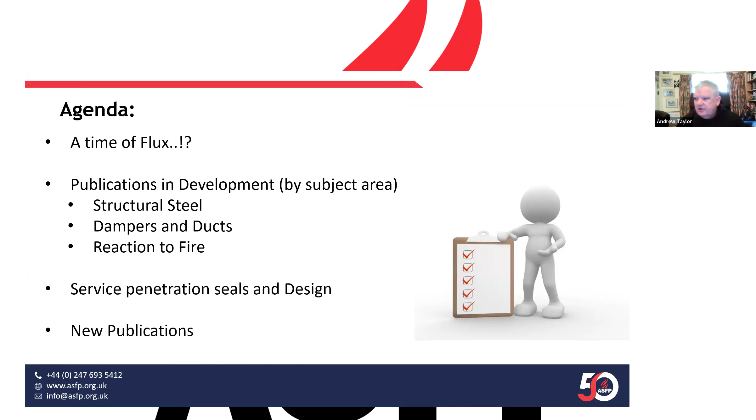Okay. So what I'm going to do here is there's an awful lot of stuff we're doing at the moment. There's an awful lot of our guidance notes and advisories that need to change. Why? Well, because we've got a time of flux. There's an awful lot of things going on out there in the wider world that means that our advice needs a bit of looking at and some development. We've got a number of publications in development in various areas: structural steel, dampers and ducts, reaction to fire we'll talk about. And then I want to move on and talk about service penetration seals especially, and that feeding into design work. And we'll cover a few bits about other bits and pieces at the end.

Okay. So I say it's a time of flux. There's a number of key things that have happened since September last year. In September last year, the Grenfell Tower Inquiry, Martin Moore-Bick published the Phase 2 report that found that the deaths at Grenfell were, as we kind of expected, completely avoidable. Beyond that, we had the announcement from government about the removal of recognition of 476 tests from ADB.

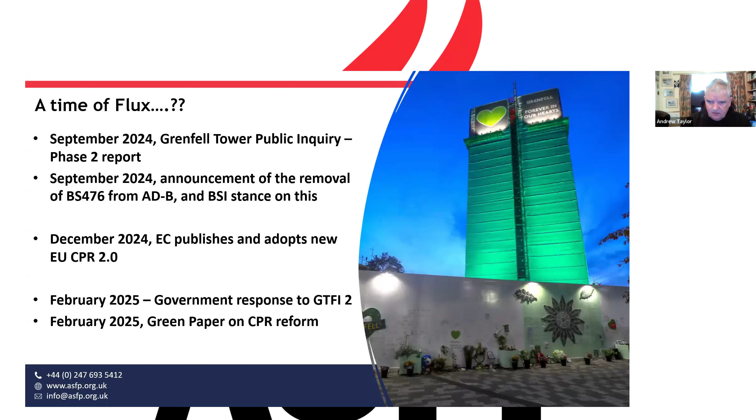And we're now moving into an area where construction product regulations are being revised and changed. We've been talking about this for the last 7 or 8 years. Well, in December, the European Commission adopted the new European CPR. And in February, our government not only published a response to the Grenfell 2 inquiry, but they published a green paper on construction product reform in the UK. So let's look at how all that might or might not affect our ASFP advisories.

The Grenfell Tower Public Inquiry made 58 recommendations, and although most of those were for government and local authorities, 8 of them were relevant to areas concerning ASFP. And I'll be honest, it didn't really build on Hackitt, Morrell and Day, except for the fact that they were covering different things, they were covering test labs and certification bodies, and government committed to responding to those in 6 months. So basically the industry at that point said, right, okay, well, we'll wait and see what government is going to do. We did that, and we waited because from September we were expecting to see publication in March.

One of the things that happened very, very shortly after was government also announced that they were going to withdraw BS 476 for recognition from ADB. In terms of reaction to fire, that was to happen within 6 months, and the 2nd of March 2025 was the deadline. So that's now happened. From a fire resistance standpoint, we were given a 5-year transition period, so that's with effect from the 2nd of September

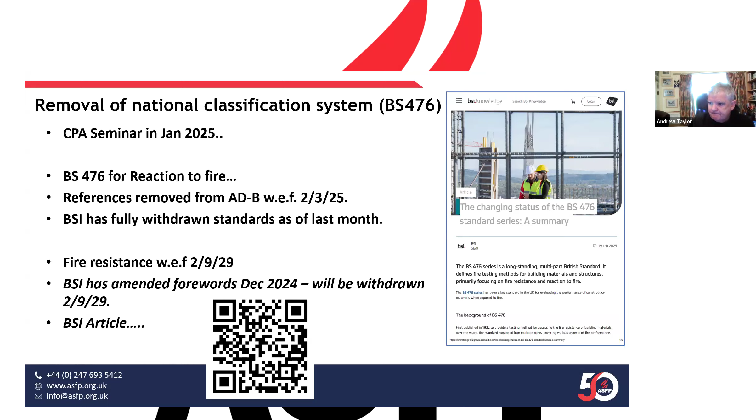Basically, as it stands at the moment, BSI has fully withdrawn the reaction to fire standards. So tests like Part 6, Part 7 are now fully withdrawn. And BSI amended in December last year the forewords for the fire resistance tests, Parts 20 to 24, to say that they will be withdrawn fully by BSI as of the 2nd of September 2029. Okay, I'll just leave that there for a few seconds if any of you want to have a look, or zap that QR code. Okay.

Next one on the list, and you're all going to turn around and say, why is this relevant? The EU has been talking about amending its construction products regulations for around about 7 or 8 years now, if not more. May even be more than 10 years that this review of EU construction products regs has been going on, because I'm fairly certain I was still at Leeds when I went to the first meeting on it. And that has now been published.

Much of it will remain the same, but a lot of our products that we sell around Europe are in the voluntary system, EAD, ETA, and that's outside the harmonised zone. So there is the possibility of countries still having national requirements. Most of the fire protection products are not covered by a harmonised product standard. It's unlikely to become a new product family for about 4 or 5 years, but we have gone up the priority list from not a priority to about number 18, 19, and we've sort of been tied in now to gypsum products and mortars and mastics. So there's a bit of a sense there.

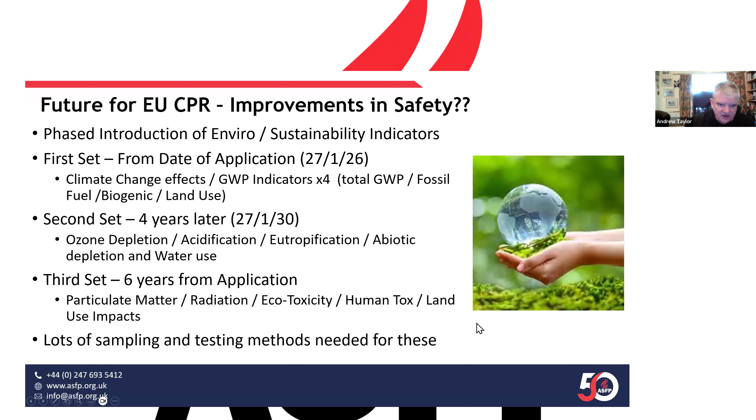And within digital product passports, basically the Europeans are getting a version of separate EU consumer legislation, and the delegated act should be coming out in autumn. Then there's voluntary use within 6 months, and then voluntary use for another 12. So it's going to be sometime around 2027 by the time this comes about. This will include a digital product passport with your declaration of performance, your instructions for use, your product safety information, and that needs to be free to access and maintained for a minimum of 10 years.

Okay. Now, there's a little slide to do first, but can you just remember all that stuff, because we're going to come back and talk about what the UK is going to do with the European stuff in a minute or two.

So end of February, government produced, as they said they would, a response to the phase 2 Moore-Bick requirement. They accepted as best they could all 58 recommendations, although some they notably accepted only in principle. One of the key concerns there was going to be a new construction regulator responsible for assessing and publishing product

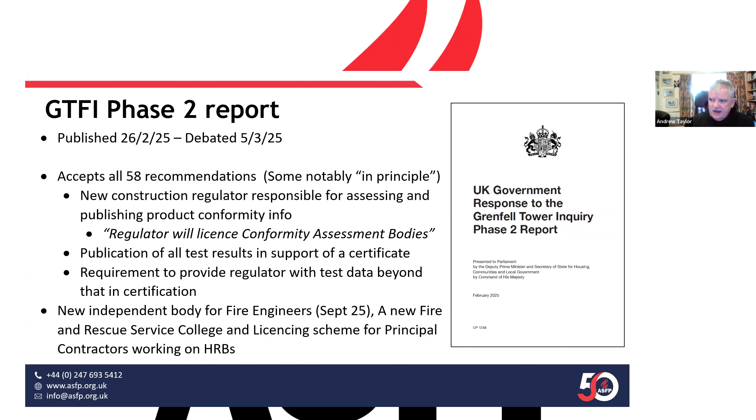The same day that came out, we also saw the construction products regulations green paper published. It looks like it's a white paper, but it's a green paper. And that's a consultation with 58 questions, and that closes at the end of May. So you've got a smidge over 3 weeks to get your responses in. ASFP advocates that if you are a manufacturer of construction products, one of our manufacturer members, please submit your response to this. It's very, very important.

One of the biggest things in here, a big change in emphasis, is safety critical. We talked in the past about what safety critical is, and that it was changed from safety critical to products critical to safe construction, which initially just sounds like word soup. It's the same thing but called slightly differently, but it's not. It's actually quite a significant change.

Products critical to safe construction recognizes that there is going to be a requirement for products to be covered by a national or recognized standard that supports safe installation. So for products critical to safe construction, design, installation, and use potentially come into scope. Okay. So the current construction product regulation ends at the factory gate. The manufacturer makes the product, he ensures that the product is the same as it's ever been, and that product leaves the factory guaranteeing the same performance as it has previously, consistency of performance.

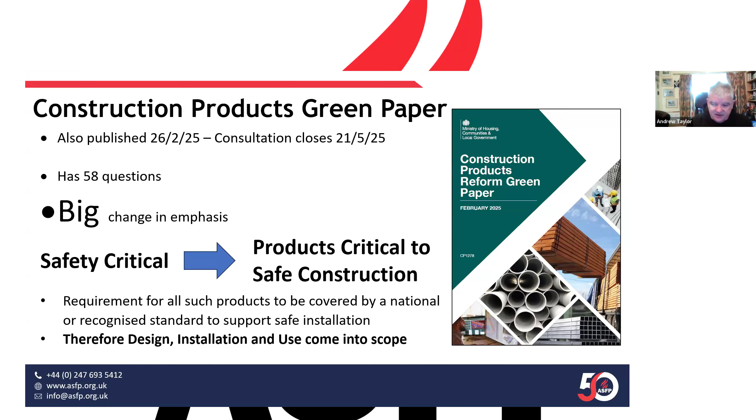Well, now there is the possibility that this is going to go further, and this is going to consider design, installation, and use. What I would say there is that we've talked in the past about a three-tranche approach for construction products reform. All construction products are going to come under this general risk-based safety requirement, and there is a new code of practice for risk assessing construction products being drafted by BSI. That's PAS 2000. Draft for public comment in summer, publish in February.

And beyond that, there is still the mandatory compliance for the stuff that's got designated standards, and the designated British standards will remain aligned to the reformed European regime. So government thinks it's got the ability and the authority to bring in any European environmental sustainability requirements and digital product passport requirements. They're all going to be brought in. So hence why I was saying to you about the European stuff, be mindful of it and watch it, because under the current government, they are seeking to reset the relationship with the European Union and look at it from that point of view.

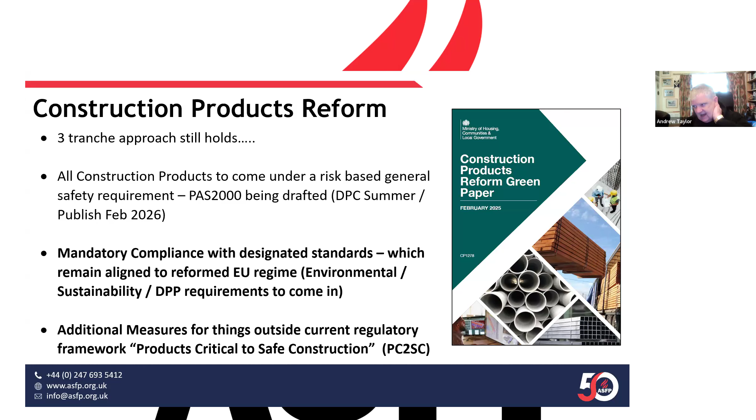So how does this affect ASFP guidance? Well, the first casualty is our orange book, the reaction to fire guide, reaction to fire coating systems. We've basically had to withdraw it because it gives advice on the use of Class 0, so we've currently withdrawn it.

I need to reconvene TG4. I'll be honest, it hasn't met since before computers - I don't think it's met since 2010. Niall and I don't think it's met in either my time as tech officer or indeed prior to that in Niall's time as tech officer. We're going back to Bill Parler and the box of papers down under my desk here - probably parchment.

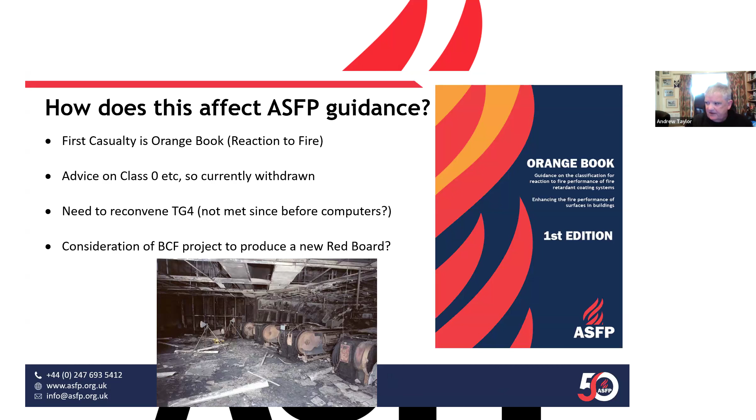We've just recently done an upgrade to some of the Yellow Book, and we need to finish off and deal with the rest of it.

What did we do with the Yellow Book, and why did we do it? We decided that it was too complicated, too long, too intertwined with the fact that we had testing and assessment stuff in there, and they were all intermixed. So we split it into 3 volumes.

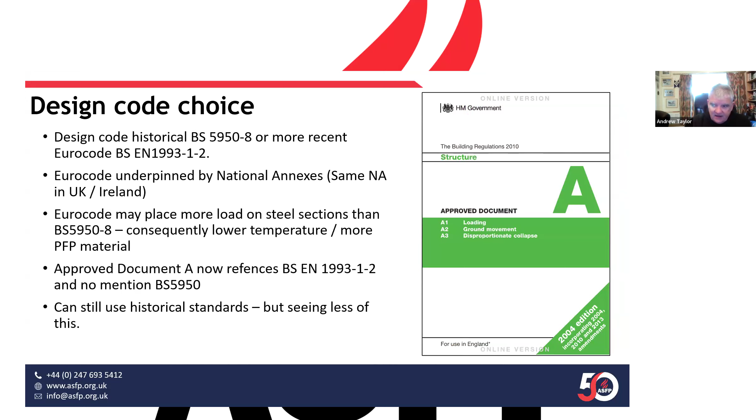Volume 1 is for design, specification, and installation, and the other 2 volumes will be to do with testing. We've had to change it because the design code that was in the Yellow Book used both BS 5950 and Eurocode 3, but to be honest, we're now moving over more to Eurocode 3, because BS 5950 has been removed from Approved Document A, so we've moved over to Eurocode 3 as well.

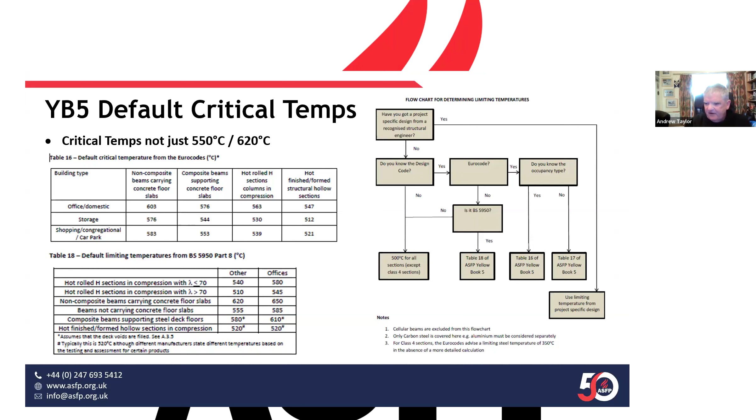One of the issues we had was in Yellow Book 5, we had various critical temperatures in there, not just 550, 620, but interlinked to the design code, the Eurocode and 5950, and different uses, and it was all very, very complicated.

And because it was all very complicated, we've simplified it, tied it into the National Annex of 1993, Part 1, Part 2, so we match Approved Document A. And we've done that with Volume 1.

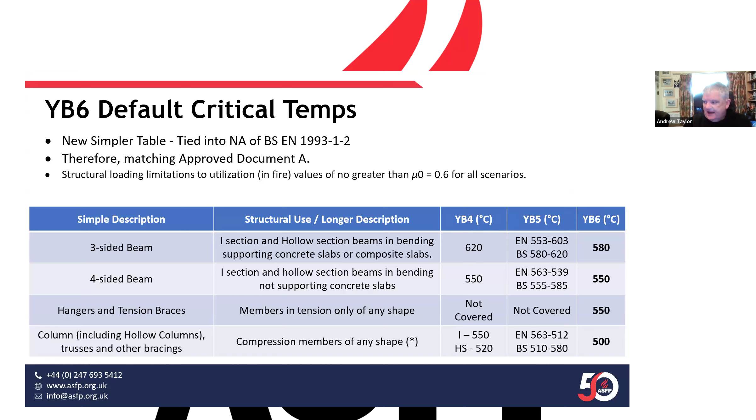Our next challenge now within the Yellow Book is to work on Volumes 2 and 3, because those contained a testing method and an assessment method used in conjunction with BS 476 tests. We've been looking at revising the assessment methodology, but it's got a limited lifespan, given the end of 476 is now September 2029.

The newer standards, BSEN 13381 Part 4 and 8, already have an assessment method, so we can't do that. So Volumes 2 and 3 have been delayed, but we think they're going to come soon, because certainly Volume 2's got quite an advanced draft. I'm going to try and get that out.

The TG1 chair, Ian Bradley, is very keen to get that out as soon as we can. So we'll be working on that. We need to do a bit more on Volume 3.

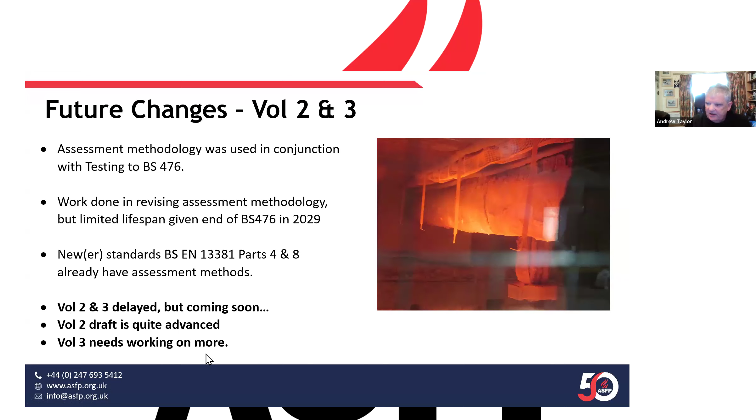And while we're at it, in structural steelwork, we've got all sorts of other bits and pieces to do. We've got to do some revalidation of the unfilled voids guidance, for where we've got a trapezoidal deck above a composite beam.

And we also need to do, as ASFP, significant work to produce a more detailed advisory note covering secondary heat transfer from secondary sections, be that heat transfer on a compartment line, heat transfer across a compartment line, and heat transfer into a member in the middle of a room that's fully engulfed in fire.

We have an advisory note 21 out there that covers one of those scenarios. It covers the scenario where you have a beam or a column in the middle of a room, and it ends up being fully engulfed in fire and is connected to an unprotected secondary section.

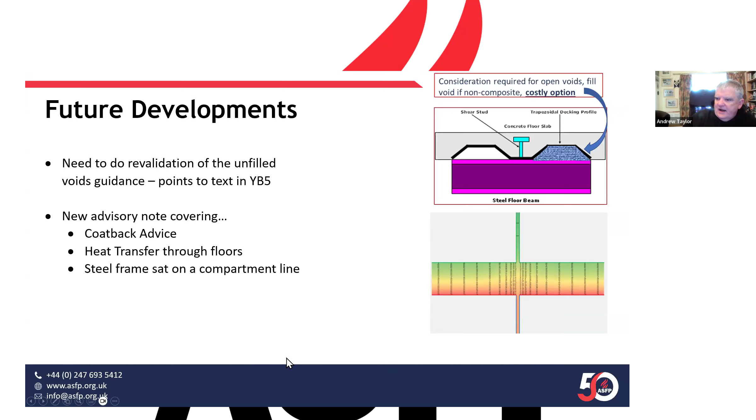The problem is that advice, because it only concerns one system, one situation, regularly gets misinterpreted and abused, and it's probably one of my least favorite technical questions that I get about once a month from somebody saying, I've used advisory note 21 for a piece of steel that crosses a compartment line, for which it's inappropriate. So there's a definite need there for further advice.

I'll mention now, in terms of publications, the Grey Book. I was getting a lot of grief yesterday, and I will be working on the Grey Book tomorrow to try and get those final drafts of these two documents out. Grey Book 3rd edition, Volume 1 covers fire resisting dampers, and Volume 2 covers smoke control dampers.

One of the things Grey Book will heavily advocate against, and this is going to become a common theme as we go through, is getting the correct terms and the correct terminology right. One of the things here is we regularly see the term fire and smoke dampers, and that doesn't help. It doesn't mean anything, and it's a term that gets used and abused.

Is it a fire resisting damper? Is it a fire resisting damper with a smoke leakage performance, or is it a smoke control damper, to be used as part of a smoke control system that should need proper designing? That's the sort of thing that we need to consider, and that's the sort of thing that we're going to be doing a lot of over the next few months.

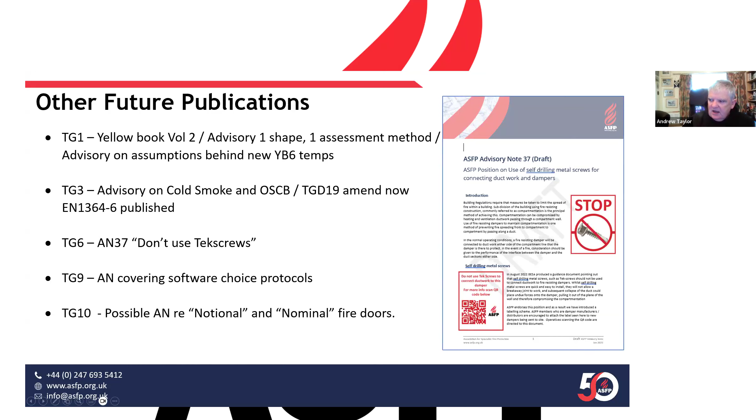Beyond that, we've got an awful canon of documentation out there, some of which is quite old and needs looking at. So over the next 6 to 12 months, and if you've been to one of our TGs already this year, the process has started. We're looking at historic documentation, asking for comments back.

Interestingly, this also came up recently, earlier this week at Passive Fire Knowledge Group, with lots of clamour from people to amend that advisory note to be far stricter, in that we only recognise from ADB the approach of alternative A: provide a proprietary sealing system.

It says we could have a 40 mil pipe, and you can actually put a bundle and cluster of 40 mil pipes next to one another, creating a whomping great hole that will burn away in 5 or 10 minutes in a fire. And we leave large gaps, yet we get upset about gap gauges of 3 millimeters. You'll fail something on a gap gauge at 3 millimeters, but you can have a 40 mil pipe according to ADB.

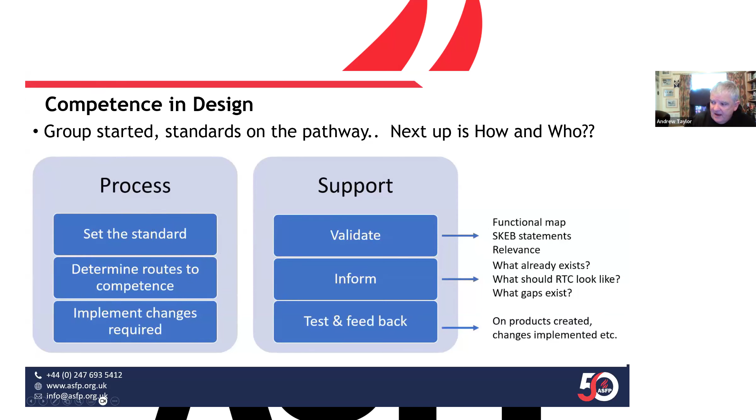And we'll do that. This first box, setting the standards, the functional map and the SKEB statements - I don't know whether you were all aware, but we've done it. It's published. If you go on the ASFP website and into the competence framework, now there is all these things.

There are all these design specification things set up. So you can have a look at what those SKEB statements look like, and if you've got any comments, have a look, have a think, and feedback to us accordingly. They're there, set in a fairly soft, malleable sandstone, but they can be changed.

Okay, please have a look at that.

One of the key questions for that group next will be how you do it and who does it. With that in mind, the question is, if we're still being asked for this development guide, this advisory note, to get around the fact that people don't want to follow Advisory Note 33 - why isn't our Advisory Note 33 enough?

And the answer is because it tells you what to do, not how to do it. This means that what we need to do is produce a massive overarching design guide that tells you not just the what to do, but also the how to do it.

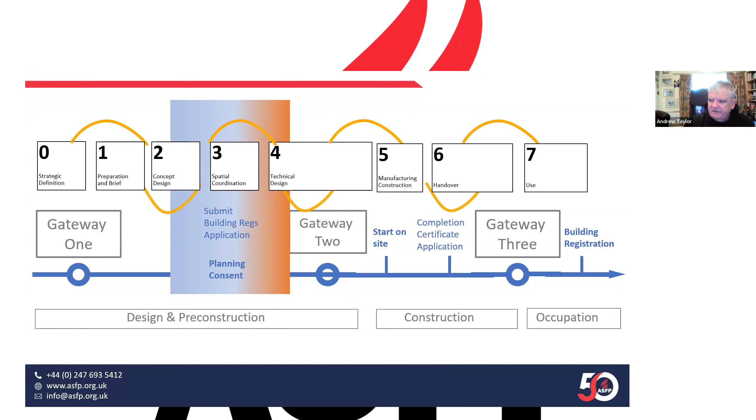Basically what we've done is we started by mapping the construction process - you've got the RIBA plan of works and the Hackitt gateways and what happens through site. We put all that together, and how all these things flow from box to box to box. One of the challenges we've looked at is who does what and when.

One of the things this process regularly gets confused about, and I've said this before in preparing advisory note 33, is not necessarily the what to do, it's the who does it and who has responsibilities. We need to recognize there are distinct roles, and some of those roles have legal responsibilities.

We're back to one of my car analogies. If I am a principal contractor or a principal designer, I have legal responsibilities under the Building Safety Act. Somebody else will also have some - a contractor might also have some, a designer might also have some legal responsibilities under CDM. And I can't necessarily subcontract myself away from that legal responsibility.

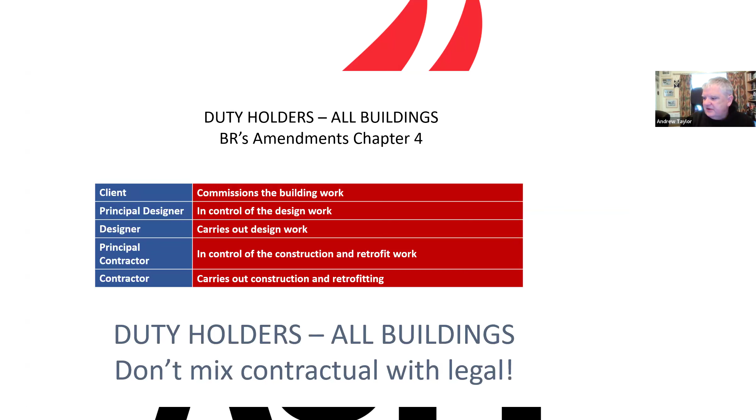I cannot go to a taxi driver and say, drive me to Coventry at 200 miles an hour and don't worry about the fines, I'll pay them - because he'll end up in prison. It won't be me. The law will look upon that. The law is on the taxi driver, not on me.

So we've looked at what all the legal requirements are for all the different people, including the principal designer looking at the Building Safety Act, the principal designer looking at CDM, and all those sorts of things, and who has to do that. You will notice that a lot of the first requirements sit with the client.

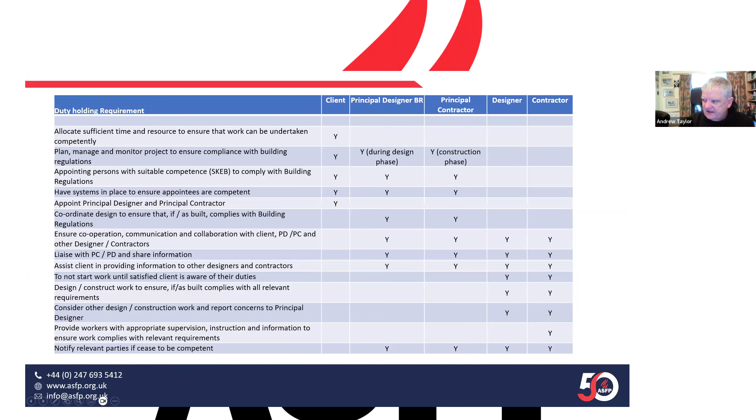We've been looking at this and trying to work out what this design guide will look like. For the purposes of that, there's a whole host of different products we're going to look at - all the standard stuff you would need. Each of these products is going to need some sort of checklists - lots of checklists about how you design all these things.

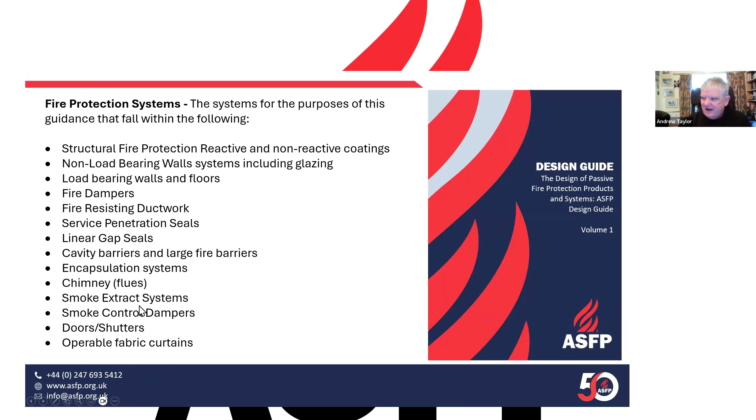But this document isn't necessarily just about how you design it, but about who and about how the thing gets set up. So we took this from the CIBSE guide, and Paul pointed out that the construction industry is already used to the concept of having somebody that manages a team of people doing something - this is what happens in commissioning management from CIBSE Code M.

So what we did was we took it and pinched the same concept, and we created a new role, Fire Protection Systems Manager. The guide recommends getting somebody appointed in this role, who then runs and manages a fire protection review team, compiled of people relevant to getting the project delivered in a fire safe way.

So there is a new role, and one of the things we need to do is go back to our design and competence people and say, can we look at that, and make sure we need these two roles in there, and we need competence requirements for what these two roles are going to do.

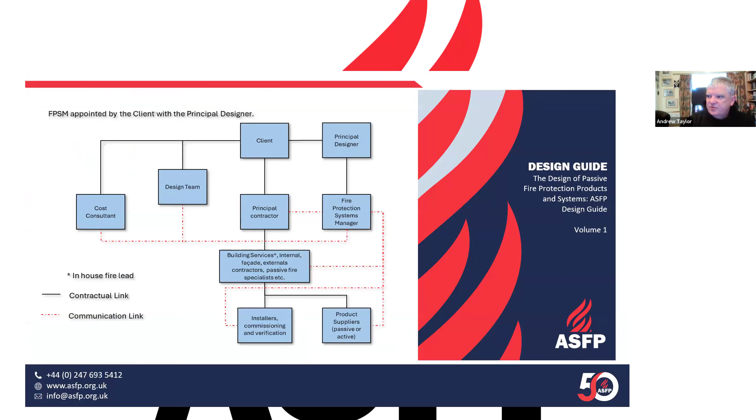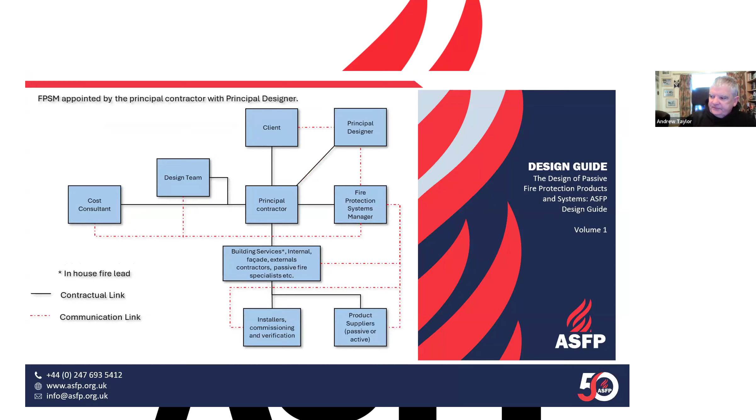We put in there, and I'm going to canter through these very, very quickly, three structures for fire protection system manager, who would appoint them, how they would be appointed, etc. And we've got within the design guide the contractual arrangement between the fire protection system manager, the PD, the PC, the client, etc. And there are subtly different arrangements that may well happen. And we'll publish, as I said, when the document comes out, we'll give you more time to have a look at

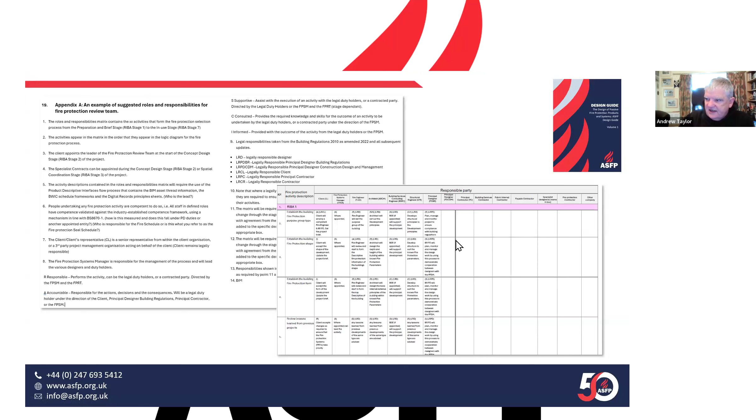these. We've also created, because it's by popular demand, a RACI model and a design responsibility matrix along the lines of who is responsible, who is accountable, who is consulted, and who is informed as we go through the process, through each of the RIBA plan of work stages within each of the boxes that we put there. And so we've done that, and one of the key things is each of those boxes is represented by a box in this flowchart, which I have used shamelessly in the past, but now there's a means to it and an end to it.

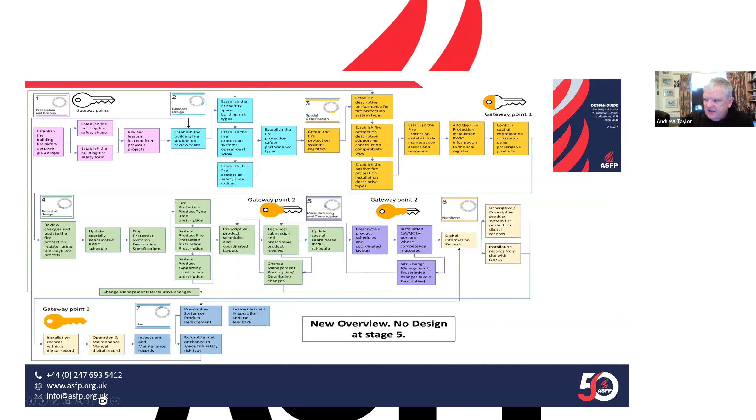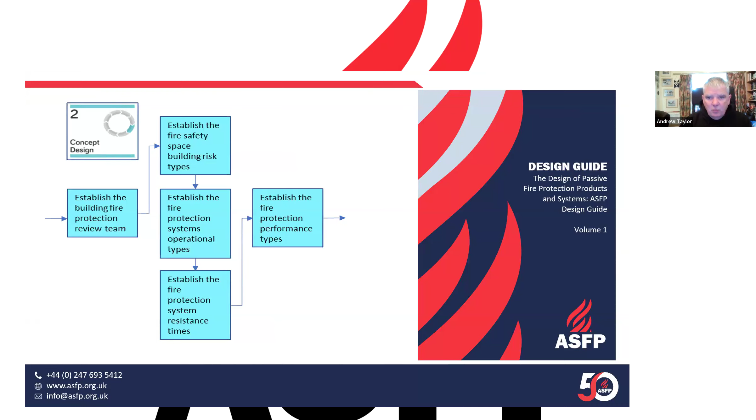And what you will see is that some of the terms will start to make sense, because if I zoom in on RIBA 2 concept design, lo and behold, establish the building fire protection review team. So it's at this point that we appoint our fire protection systems manager, and we get that team going much earlier in the contractual process than has happened in the past. And one of the things that team needs to do is go through and decide what the building is, and make sure that we have a proper strategy and a proper series of information on which to base the building design.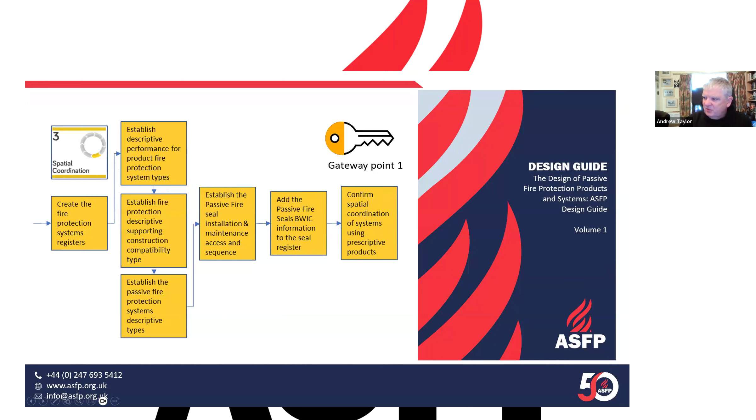When we get into the next stage at spatial coordination, there was an element going through this process with Paul where I said, establish descriptive performance for product fire protection system types. What's descriptive performance? You've made that up. We're going to have to define it. And it's here as well. Confirm prescriptive products. Descriptive, prescriptive, where does that come from? At which point Paul pointed out, well, actually, descriptive design is a RIBA term. So that's what I'm trying to say with this document coming forwards. This is what we're trying to do.

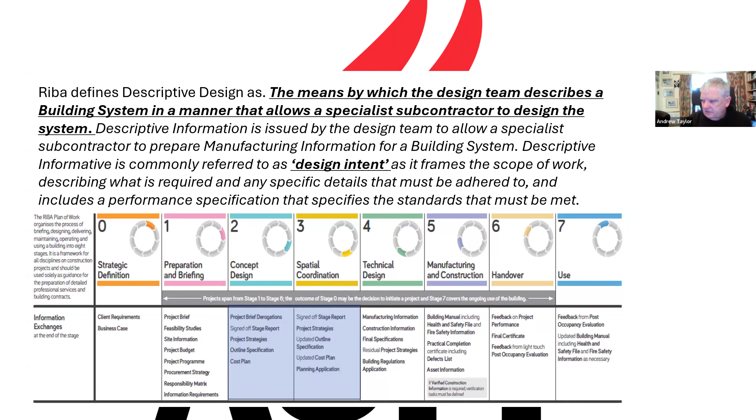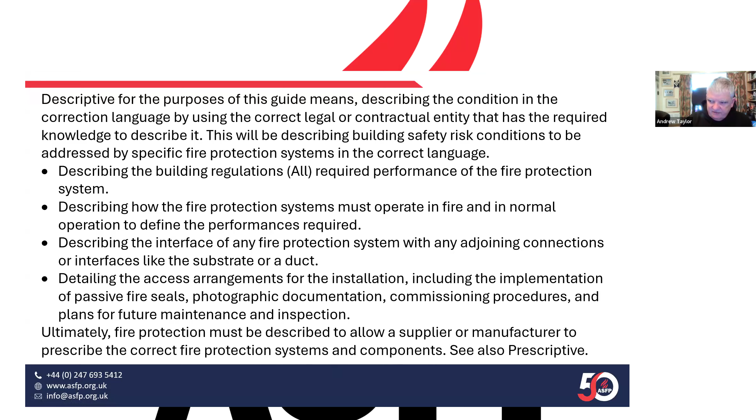We will be trying to get people to put it into the terminology that the RIBA designers use, and so descriptive design, define what it is you're trying to achieve. The key expression here is design intent, and that's set here in concept design and spatial coordination. What are we trying to achieve? And so we've used that and defined that and put that into our own descriptive version of this and what it means. And this is text that will be in the draft guide. But in effect, and you can tell this is taking information from Paul McSorley, what it does is take us through this process.

It says what's the building fire safety requirements? Have we got people sleeping or not? Have we got people that can't get out? What's the fire safety requirement? And you don't just need to consider Part B, but for a damper you need to consider Part L, Part O. Have you got the power for it, Part P, and all that sort of malarkey. And that will take us to a classification statement that we need. And once we've got that, we also need to consider what the supporting construction is, how it's going to be installed and what type of access we've got to it.

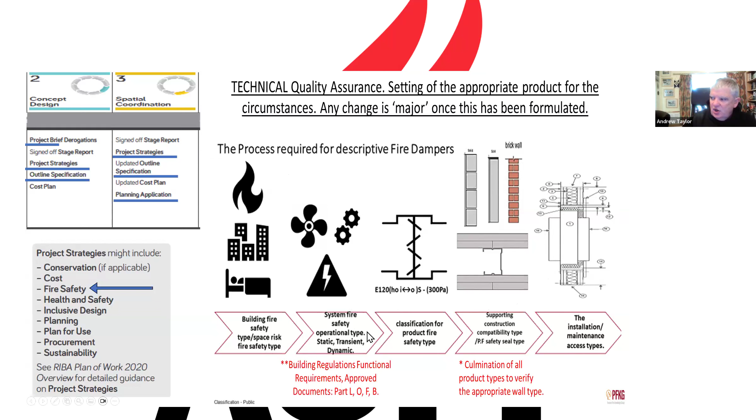And what we're trying to do is plan as much of this as we can early, before we get to the technical design stage, because once you've got a proper good description of what you're trying to achieve, then the specification, which is the prescription, as RIBA would say, comes from that. And that also means that we've got a route through the design.

If we're going to change the description, we've got a loop to go back to change the description accordingly. So if we can't achieve it, what do we do? Do we change the description in some way, shape or form? Do we change the risk register? Do we change the description of what we're trying to achieve to help us work in some way, shape or form?

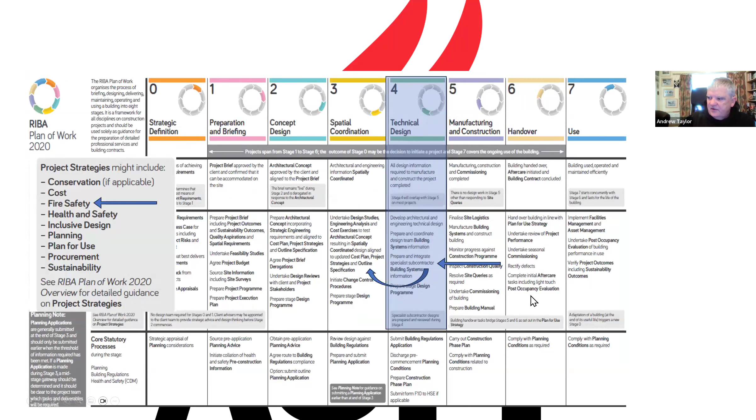So we've got lots and lots of things in, and the project strategies that we see in technical design are going, they may well have to go back, but we're trying to use the terminology that RIBA gives us, and so therefore prescriptive design. Okay, so now if we have a description, the description tells us what to do, and the prescription tells us how we're going to do it. I go to the doctor, I describe my symptoms, and he gives me a prescription to how to fix it.

And so some of these prescriptions may well need to come from the fire protection manufacturers and the suppliers. Some of them may come from the specialist contractors. It depends what we're doing and where we're going.

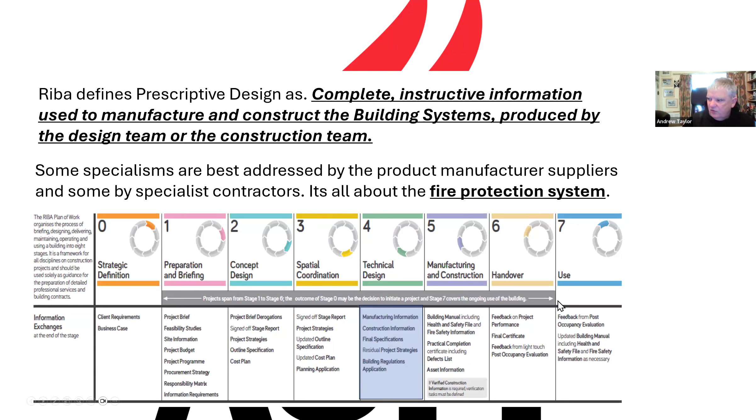Okay, so we've got definitions of that, and in there we've got all sorts of fancy flow charts. We're going to say, well, this is a development document, but we need to bring this out rapidly, and this takes us through a way to set the client, the contractual chain up, to hold a kickoff meeting and what to discuss, to come up with the descriptions, to hold the meetings, to develop the prescription, identify where you have problems, and then loop back round. And if not, then once everything's sorted, go through and build it.

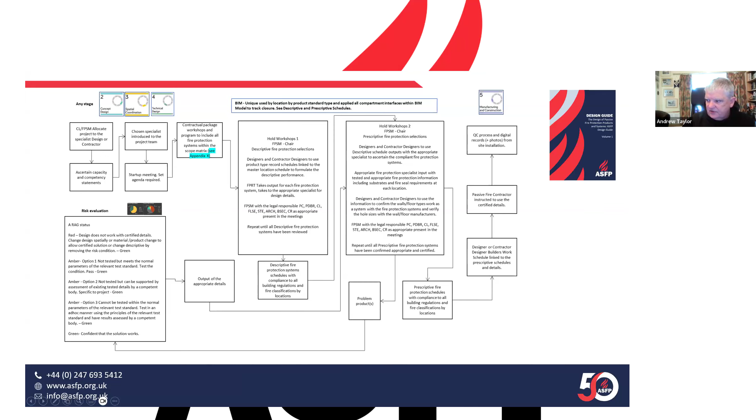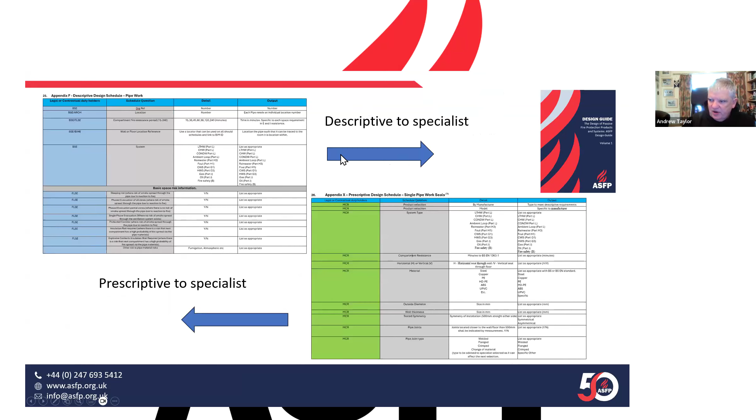And I'm conscious of the fact there's a lot of stuff in there, but there will be a consultation we'll be doing on this as we continue to develop it. I've already mentioned this. There will be an awful lot of checklists needed for this. Okay, so we'll be working with our individual TGs on what these checklists look like as well.

And one of the things we've tried to do within this is simplify this bit here, right? Because when we're building it, we just build it. We have got loops back if we need to change it. And in an ideal world, or if we have a problem on site, we change the prescription. We don't change the description. Okay, but we change the prescription.

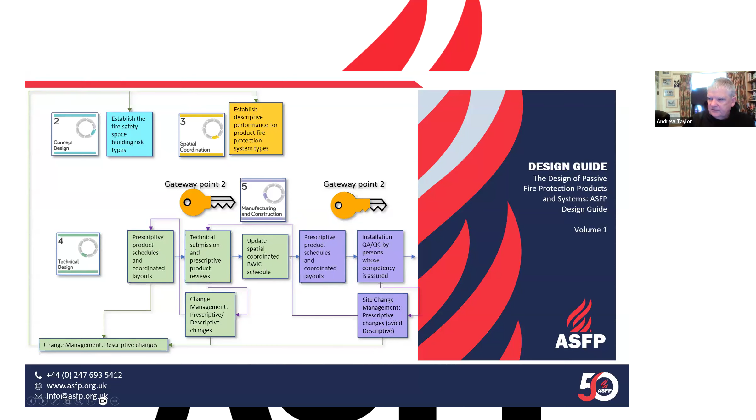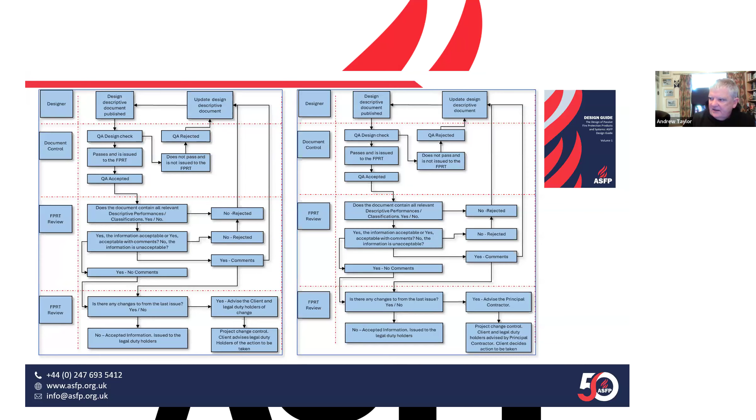Okay. I'm trying to remember what Paul told me those were. That's a whole way through a change management process as we move through the construction system, aligned to RIBA plan of works. And at the end of it, hopefully, we've got the records of what we've done, and we can hand those over, and therefore we get through Gateway 3, and permission to occupy is achieved much easier.

And that will be all the text that we will see, and all the information that's in there. That will take us into the golden thread, and this will tie in with the information that's going to be in the golden thread. Okay, and of course, once the building's in use, we need to have a review of what we've done to make sure. And again, it ties in with where we are within RIBA plan of works.

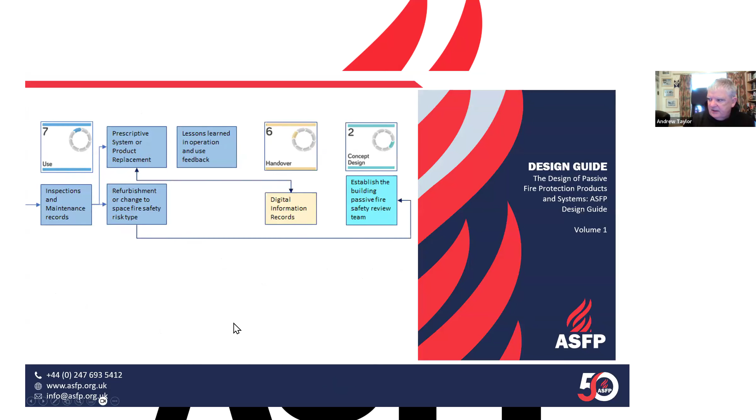So basically, we have a draft text, and we need some volunteers to help peer review it. It's about 130 pages long. I had half a dozen volunteers from yesterday. Again, if you're interested, I don't want too big a panel. So that's the sort of stuff that we're doing at the moment. And this one will be a massive piece of work, because I want to get this out into the industry, so that people can work on this.

Okay. And I knew I was going to see that last question. Thank you very much, Chris.

Okay, so that gets us pretty much to the end of my slides, and takes me to questions and answers. I hope I've given you a flavour of all the stuff that we're working on, and all the bits and pieces that we've been working on. And this design guide will be one of the biggest things going forwards.